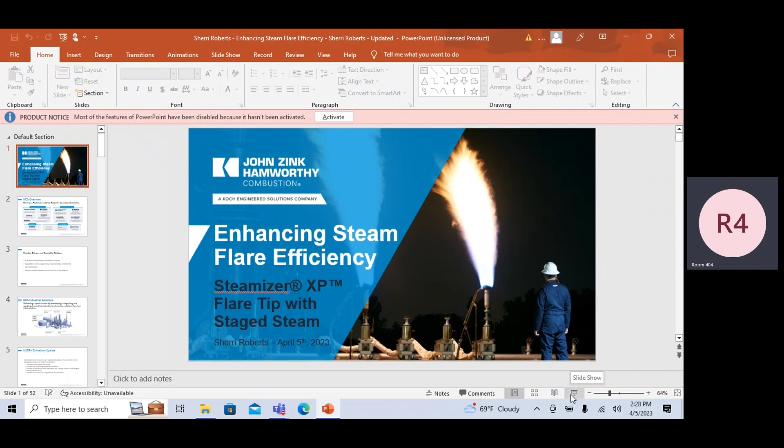Sign this. Still working. Sign this too. Yes, sir. If anybody didn't sign, would you mind signing this list?

Everything go well? Yeah, it's good, except I said way too many times. You got another pen?

I love it that you... We handed out a bunch of questions asking for feedback, and all the pens we gave out didn't work. Didn't get much feedback, right? Yeah, it worked.

You gonna switch our board up? I'm about to. Perfect, thank you. We got a QR code, just stick up there.

Sorry for going over. You're not over, you're good. So last year I was here, the guy went over 35 minutes.

So I told Chris, tell me if I'm going over. Don't know yet. I might be. We're able to monitor.

I'm gonna get a copy of this, or should I take a picture of it? I don't know, I think I do, but...

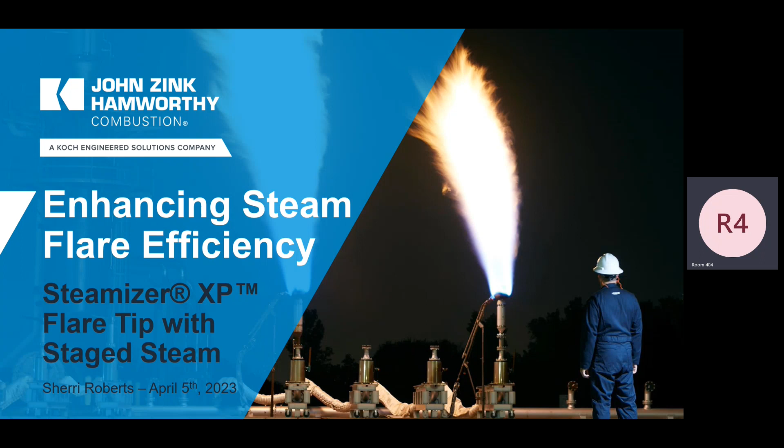I'm gonna talk a little bit about steam flares and how some technology we have can help improve efficiency on steam flares and help you meet some of these regulations that have come down the pipeline in the last few years. Just a little bit of brief history about Zink.

We get a lot of questions lately. Are you guys Koch? Are you guys Zink? Who are you? We are still Zink. We're still very proud of our name. But we are part of a company called Koch Engineered Solutions.

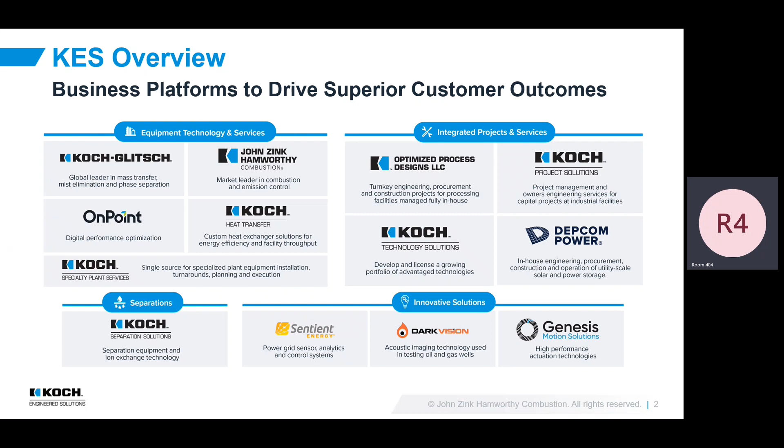We found some synergies across our sister companies. Some of them you may recognize up here. So we kind of teamed up with a lot of them, how we can bring value to our customers, how we can team up and bring those options to you. And that's why we have the umbrella company called Koch Engineered Solutions. So if you hear that name, we are still Zink, very much so. This is just kind of a program we have with our sister companies to help bring value where we can.

Those are slides, I just don't want to go over on time here. So I think most of you were probably in the training yesterday that our Spectrum friends gave, and it was a great update on regulations. So I'm not going to spend a lot of time on this, but the main point of my presentation is how we're going to address these regulations for you guys.

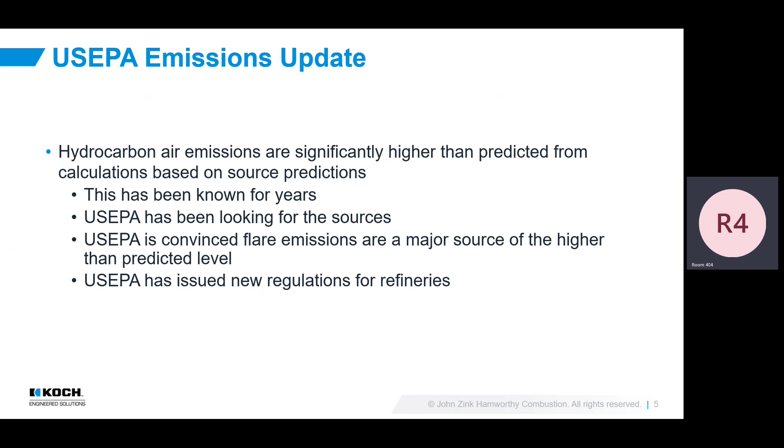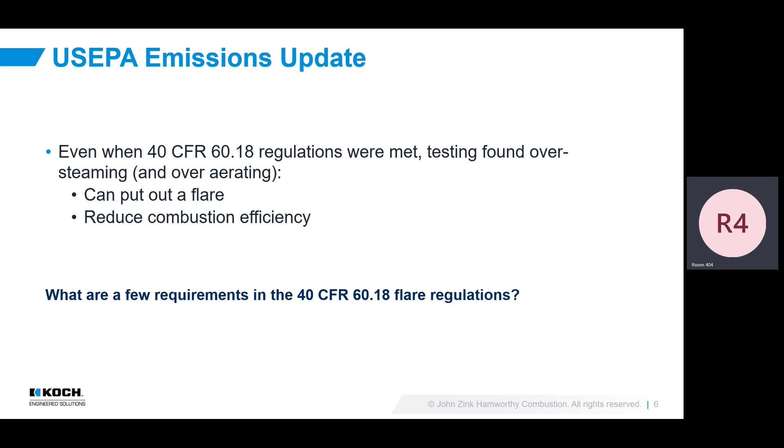So just quickly, all of you I'm sure are familiar with the EPA emissions updates that have come out. Stricter requirements for flares, especially on steam assisted flares. From all this testing, it was found that even when 40 CFR 60.18 is met, flares can be oversteamed. Their combustion efficiency can be greatly reduced. So this is the solution here that we're trying to find: how can we meet this? How can we help you guys meet these needs?

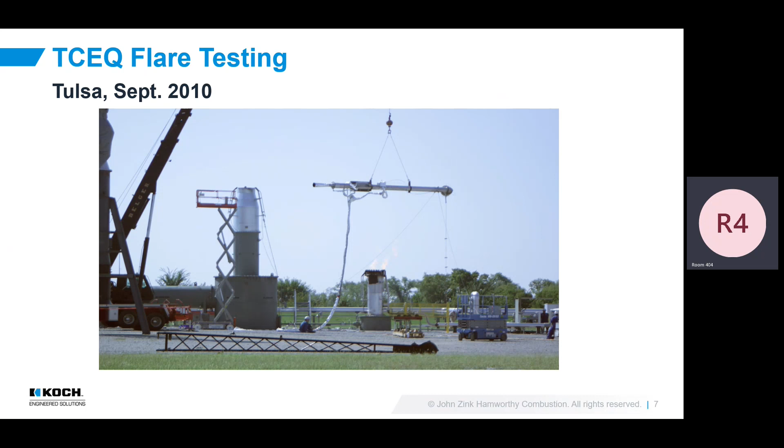It's really hard to do this at a large scale, like in your facilities on staff, which is why our test facility was used for it. While it was done at the Zink test facility, we did not run the test. It was totally independent. We just basically provided the facilities for that testing to be completed independently.

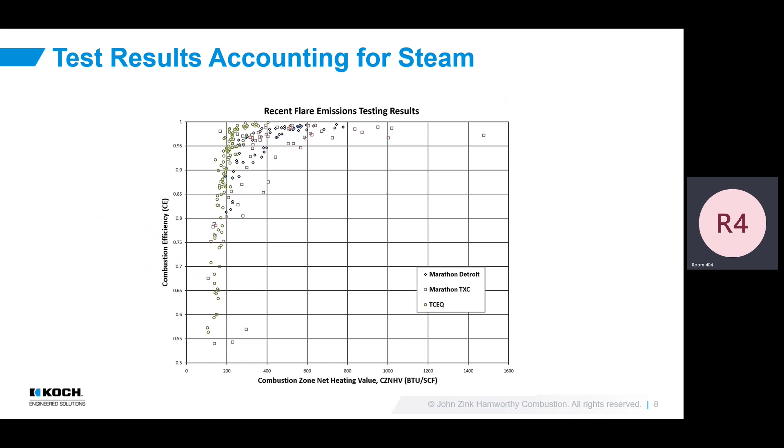You can see as that reaches that 200 to 300 combustion zone net heat value, how quickly those combustion efficiencies drop off. It just takes a nosedive as soon as you hit it. That correlation was found from going through all these test results, and that's where the combustion zone net heating value values came from and got put into those regulations.

I really like this slide. We got it from the TCEQ. They've actually used this in quite a few testing, but we borrowed it from them. It was also shown yesterday, but I want to hit on it again.

The key part in all three of these pictures is that the flare gas is exiting at the same flow going to the flare at all these times. It's the same heat value in all these pictures. The only difference is the steam rates going to the flares. You can see the differences in how these flames look. I would argue even in this one, there's not a lot of flame going on.

What you want to look at here is the steam to vent gas ratios. In this first picture, we have a very bright flame, getting pretty good destruction efficiency just by visually looking at it. It was proven it's a 99.2 destruction efficiency in that first picture. Your steam to vent gas ratio is 0.29. That's a very low steam to vent gas ratio. Most flares out there don't operate that low, and steam flares do not.

But let's jump it up just a little bit. 0.29 to 0.54 - that's just like a little bitty tick on your steam valve, right? You can kind of control that close anyways. Not very good, but we jump it up to 0.54. Your destruction efficiency automatically drops to 90.6. That doesn't sound like a lot, right? Not too much, but that is significantly a lot for emissions coming out of your flare.

So you're at 160 pounds of unburned flare gas. Now you're at 1,880 pounds of unburned flare gas. That's a lot more flare gas that's emitting from your flare.

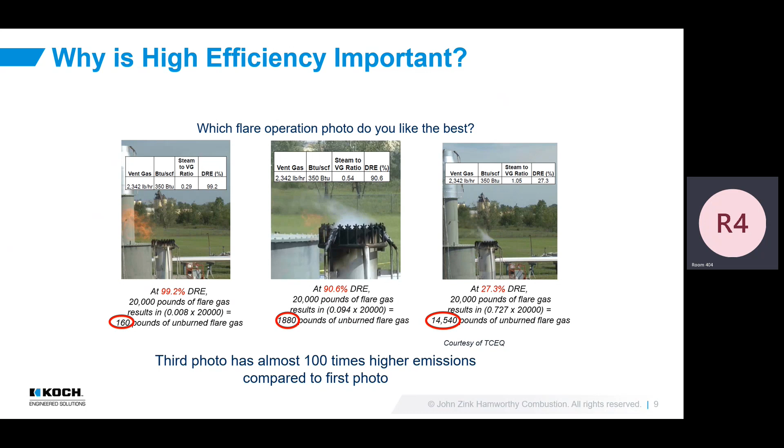So what did all this testing tell us? I like the joke I was told yesterday - water puts out fire, right? That's essentially what we learned in all this testing. If you oversteam a flare at turn down conditions, you reduce your combustion efficiency.

From this testing, it was found that if you have luminous flame on your flare tip, it's a pretty good assumption that you're having good destruction efficiency coming out of that flare tip. Operating at the incipient smoke point can be shown to have the highest destruction efficiency. You guys know what I mean by the incipient smoke point? Getting a couple yeses - that's literally right before it starts to smoke, so you start to see those black formations in your flame, but it's not actually exiting. That's what we consider an incipient smoke point.

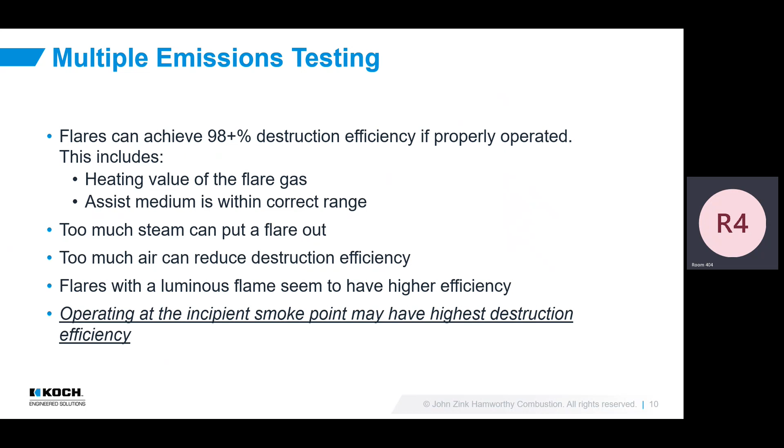Your flare operating envelope is going to be much tighter than it was in the past. Used to, this is all we were worried about - we didn't want to see smoke coming from our flares. A lot of operators even wanted to see no flame coming from a flare at all. Of course, we all know that's not a very efficient flare at all.

One of our long-term process engineers actually retired last year. He likes to tell a story. We got a call having a complaint of odor coming from a flare, so he goes out there trying to help them out, and this is what he sees.

So he says, well guys, you're putting out your flare, you're putting way too much steam up there, you need to back it off. They did. Flame came up, odor went away. They said, hey, this is great, let's go to lunch.

Before they even leave the refinery, the head of the refinery calls and says, what'd you do to the flare? Why is there a fire up there? You need to turn that back off now. It's like, well, that's what we had to do to get rid of the odor. I don't care, I don't want to see a flame up there.

This is what we get complaints about, this is what I get calls about - I get calls about this in the middle of the night. I don't want a flame up there. So it's just a knowledge thing. People don't understand it, people don't understand flares.

Just like we were talking about yesterday afternoon in California, getting 911 calls when there's a flaring event in California. This is what we want to see. So it's going to take knowledge and explaining this to everybody, but this is how your flare should look, with that preferred luminous flame.

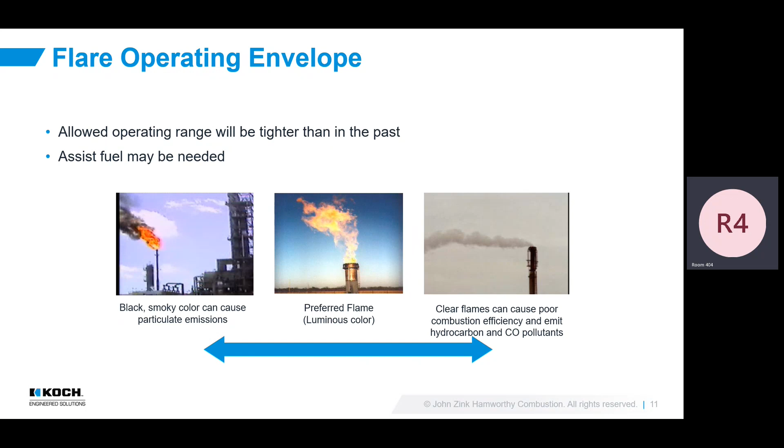So we had the refinery rules come out, so everybody's familiar with those - they've already been implemented. The biggest thing that came from there is that net heat value combustion zone. At high flow rates, sure, no problem, these steam flares are no problem at all. Where we struggle with this is at turndown conditions.

All steam flares should have a minimum flow going to them, steam flow going to them at all times, to help protect them. If you don't have that minimum steam flow going, there's a good chance you're going to burn up your flare very quickly. So there's a trade-off there - do I want to not have to add gas to my flare, or do I want to protect it and not have to replace it in 6 months? All flares should have some sort of minimum steam going to it to help protect it over time.

Some other benefits you got out of it is that 1212 heat value for hydrogen, so that's a good thing - you got hydrogen, and that is based on a 15-minute block average.

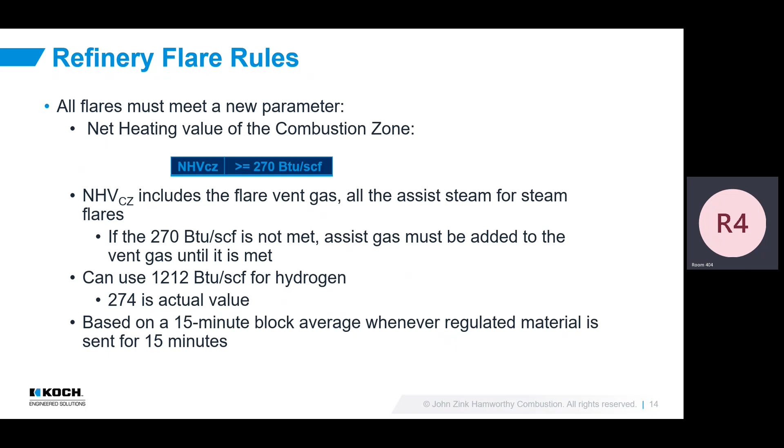So just a quick glance of what you used to have in your refinery ground flare, and this is what you need from the refinery rules. You have to have a minimization plan. You have to measure your flare gas. You have to be able to give the composition or the LHV measurement of it. You have to have an assist gas control - if you're not meeting that net heat value combustion zone, you have to add assist gas to it. You have to be able to measure your assist steam or assist air, depending on the type of flare you have. And also you have to be able to monitor with a camera and keep that in your files.

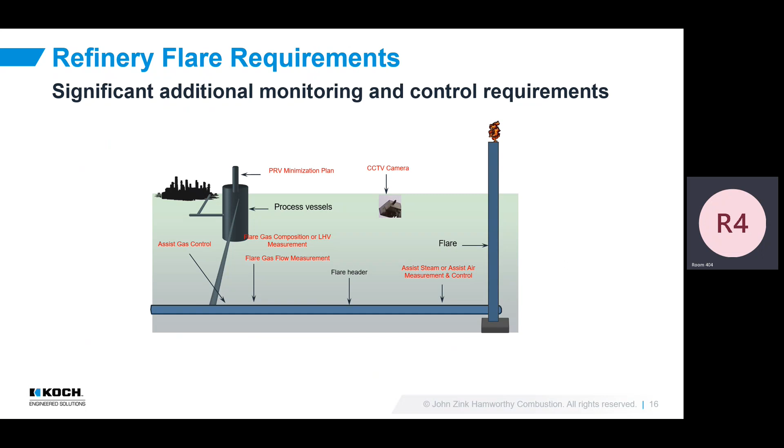So I just like to show that to show the big difference between flares. When I first started in the flare industry, we didn't have any of this, so it's very nice to know. Ethylene rules came out, very similar - really the only addition was some topics on pressures.

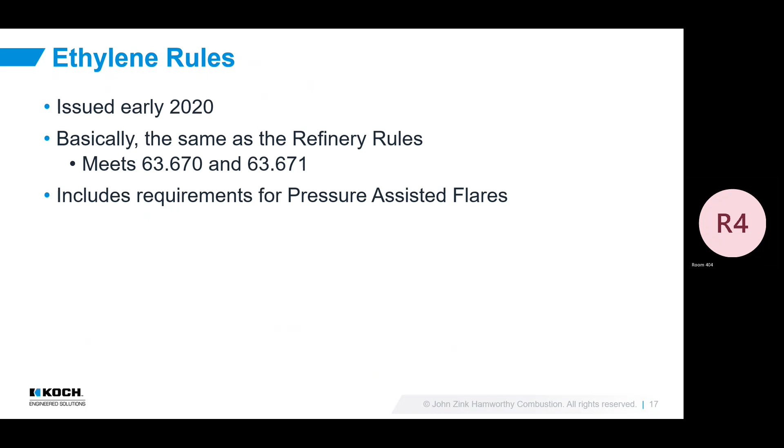So what does this mean for flares, right? We want to be able to minimize your flare - they're wanting you to minimize your flare gas flow as much as possible, they don't want you to flare. But that means it's much harder to operate in turndown conditions, and also have to minimize your steam flow if you're not already at minimum steam flow. That increases your net heat value combustion zone - if you don't have enough, you have to add assist gas. All of these factors have to go together and get very complicated on how to operate your flare.

And this operator is not worried about the flare - he's worried about these 100 other things going on with your flare system.

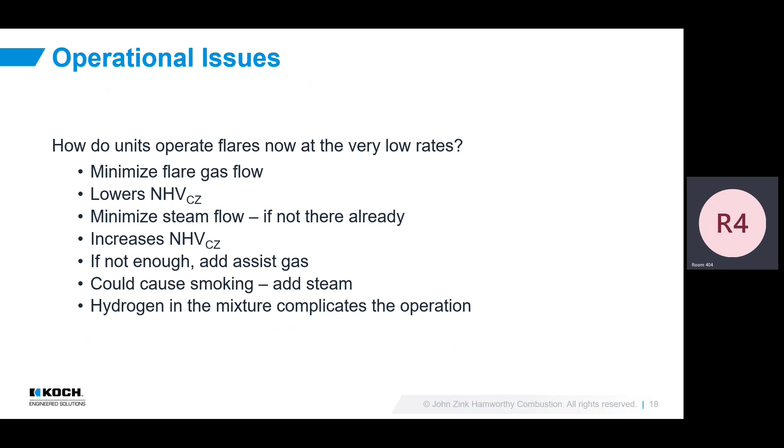So let's think about steam flares. How many of you have steam flares?

Yay, good. I have some steam flare people out there.

Just a little bit of history on the flaring industry and flaring world. The flaring world started in about 1940, when the government started regulating venting. Steam flares weren't part of that at the time. Basically, it was just a fire on a stick. They called John Zink and said, 'Can you give us a burner on a stick?' And that's what we supplied. That started the flaring industry.

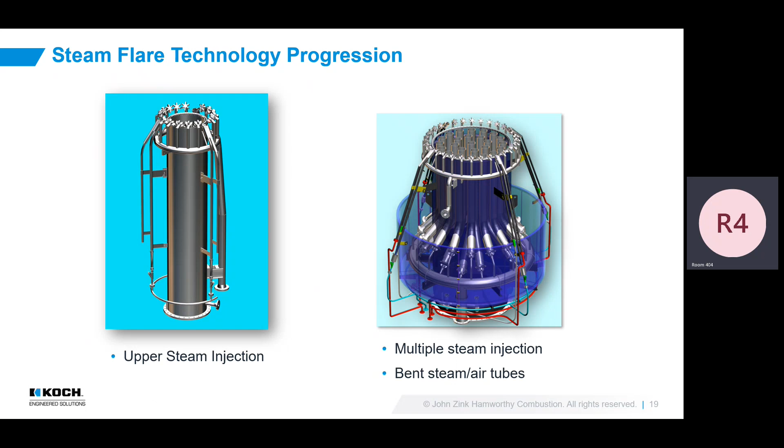I didn't hit on this earlier, but what is this steam doing in this situation? Does anybody know how this steam makes it smokeless? Bringing in a large volume of air with turbulence - so it's not the steam, but it's the air. Thank you, that's great - that takes it with it.

So if I want air in there to make it smokeless, why wouldn't I just use an air flare? Anybody know that? Steam is actually much more efficient at entraining air than air is itself. I could put air through the steam line at the same pressure, the same flow, and it would not entrain near as much air as steam would, because steam has a higher critical velocity, and that's why it's able to bring in that extra assist air. So that's why steam flares are much more efficient than air flares. Most of the time in your plants you have some extra steam available, a blower, so it's an available utility. It doesn't cost a lot of money over supplying these huge blowers that you have to run on power and things like that.

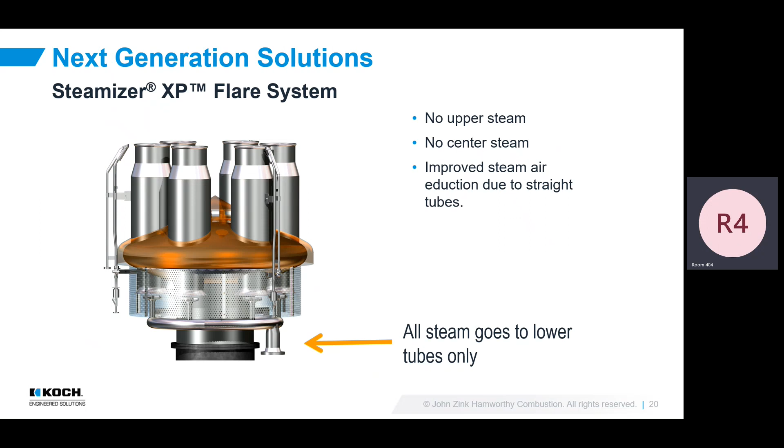So why is the XP so much better than other flare tips, than those other ones we saw? It provides superior smokeless performance through what we call moderated shear mixing. That's what was in the patent we filed on the XP.

Basically, when you burn hydrocarbons in reduced air mixtures, carbon particles are able to form, which build upon each other and create soot particles, which is then smoke. This is especially important for unsaturated hydrocarbons, which we call soot precursors, like olefins and propylenes. They're very reactive, so as soon as they start to heat up, they crack and start to find carbon particles to attach to, since there's not enough oxygen there where you need it. That's why the XP can provide superior performance over those other styles of flare tips.

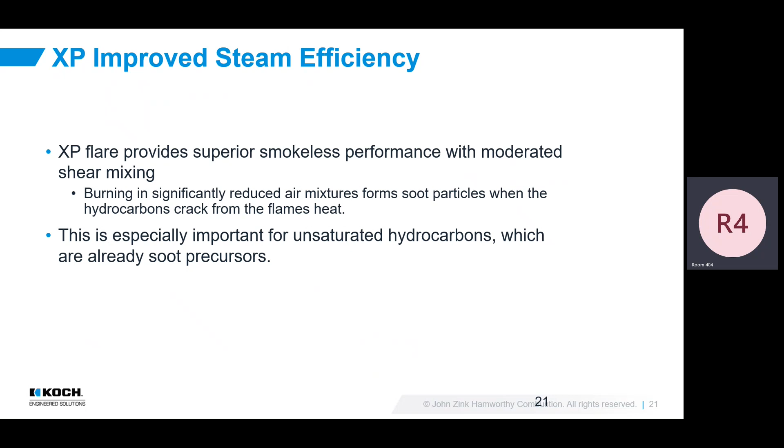Kind of like in your ethylene furnaces, you get coke filling up in the tubes—that's all carbon. That's what your flares do as well if you don't get oxygen there for it to react with.

So the moderated shear mixing is up here at the top—that's a key part of the XP. The other part is secondary air entrainment. With a 48-inch body on those other styles of flare tips, you have this huge bluff body that you're trying to pull ambient air around, trying to increase mixing energy. But around a big bluff body, you just can't get as much mixing or pull as much ambient air into it. We've broken this up into different arms, smaller bodies, and you get more perimeter area to really pull that ambient air in. So it creates its own jet as it exits at the top and pulls in ambient air to help provide additional smokeless capacity.

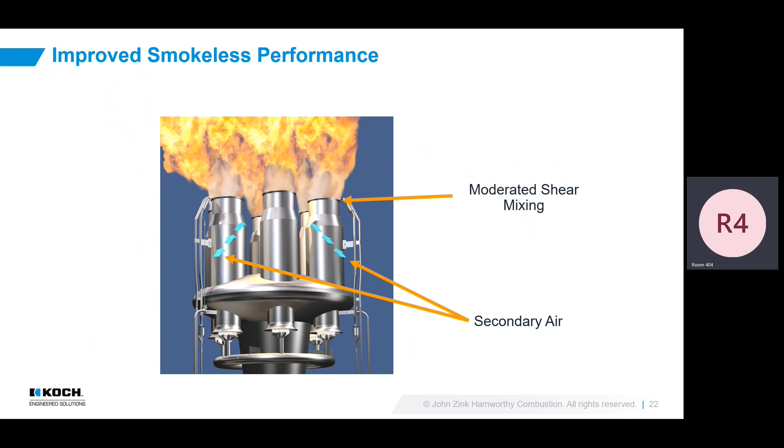Here's a better view with the windshield off the bottom. You can see the steam jets here going into a straight tube, going up inside that tube as well.

First of all, the API just sets a steam to hydrocarbon ratio across the board. It's hard for your flares to meet that at turndown conditions, because steam flares are not as efficient at turndown. You have this large steam jet designed to flow thousands of pounds an hour, but at turndown you're flowing hundreds of pounds an hour at a much lower pressure. So it's not nearly as efficient in those situations, which means your steam to hydrocarbon ratios automatically go up.

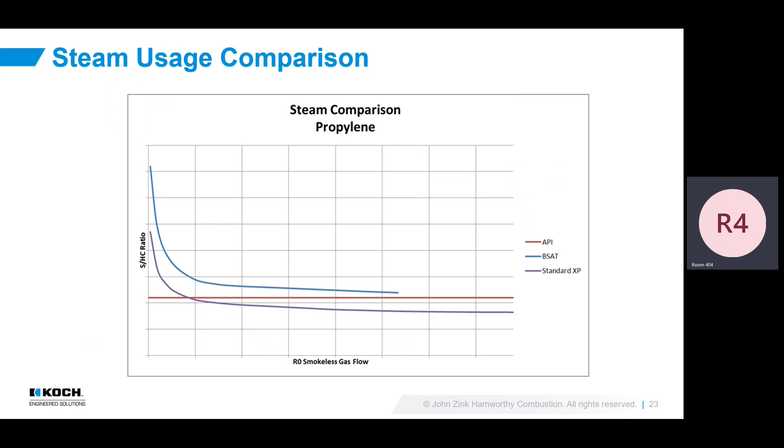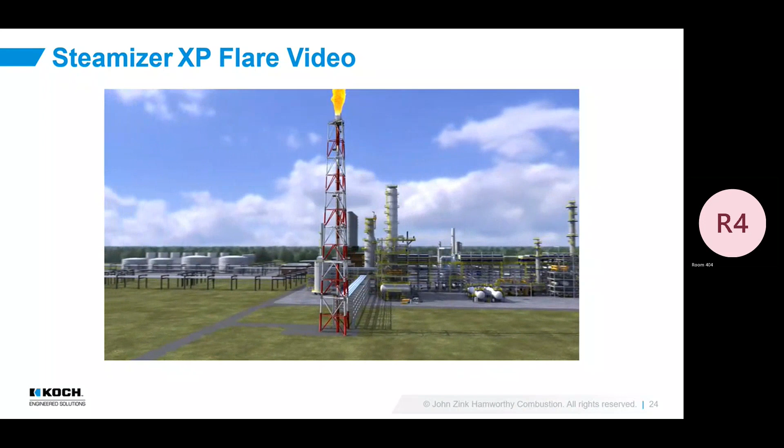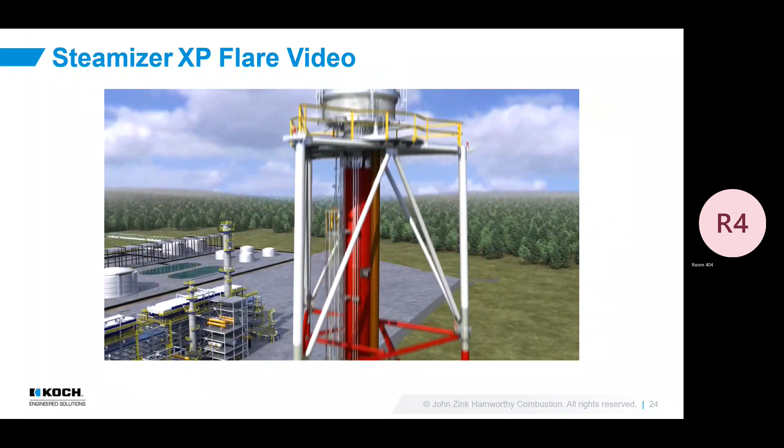Gonna zoom in up top here, see the different points as we go through it. The first is gonna show you the pilots. Not every module is piloted because they do cross lights, so that's why you don't see a pilot on every module.

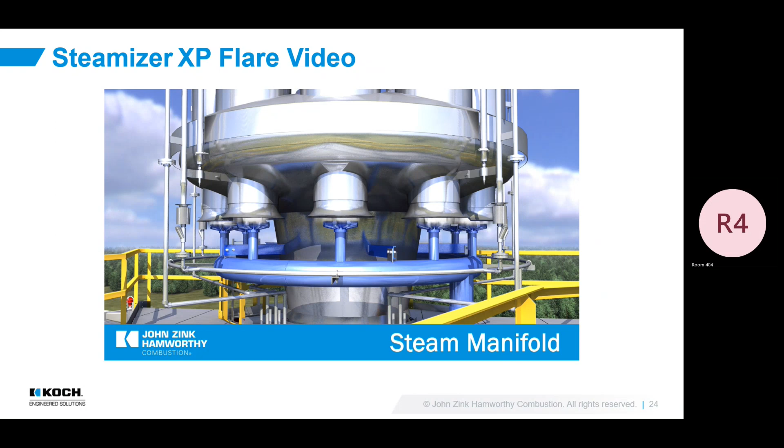Zoom in here where all the steam is coming in on the lower portion of the flare tip - that's the steam header.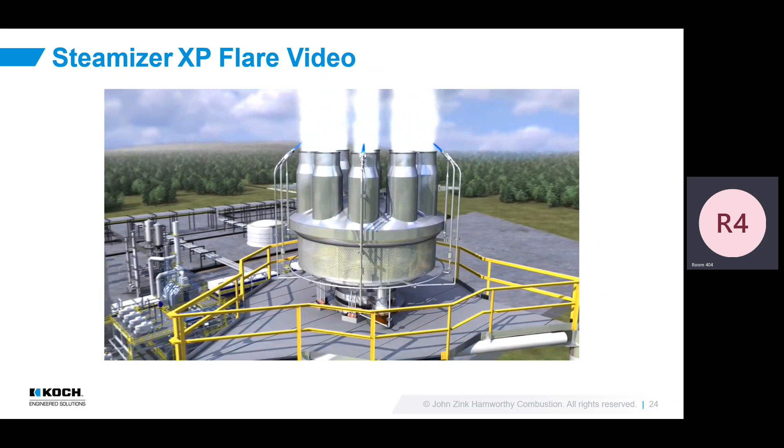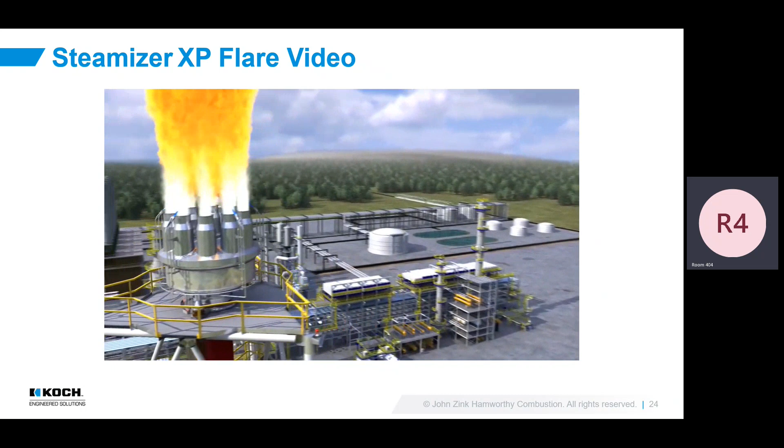Then you have your straight steam tubes. That's another big thing between the SI style flare tip. On the SI style flare tip, you have bent steam tubes, and you have to overcome that back pressure through those steam tubes to pull that air in. On the straight steam tubes, we don't fight that issue, so you have less pressure drop you have to overcome, which allows you to pull in more air and be more efficient in those situations as well. I forgot to mention that earlier, so just some benefits that the steamizer can offer as well too.

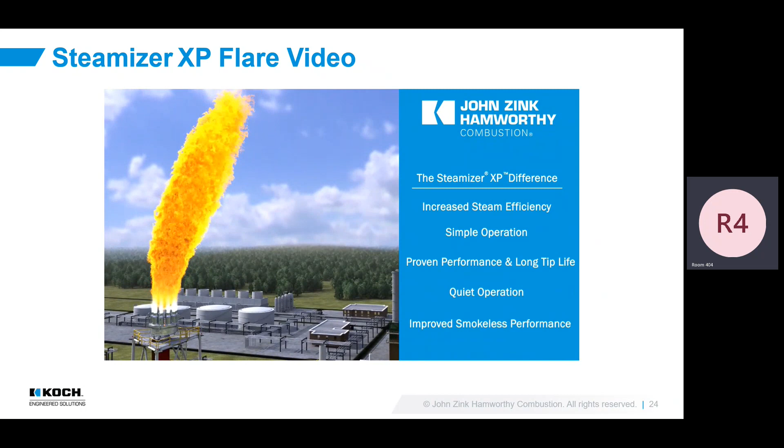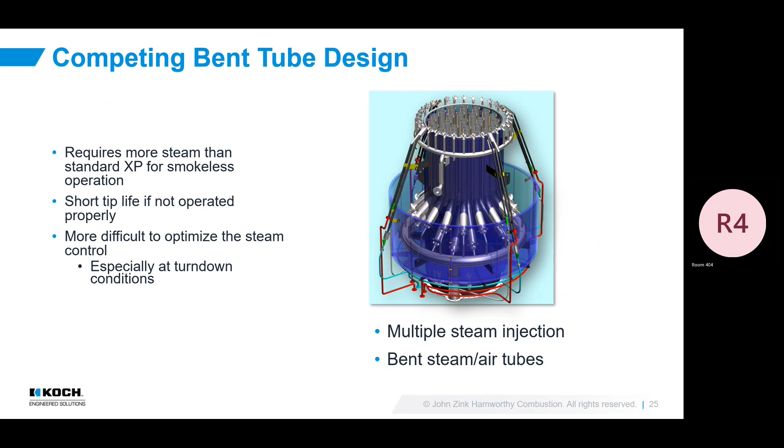The other part with this style of flare tip is it can be difficult to control. You have the upper steam line you have to control, you have the lower steam line you have to control, and a lot of times on those flare tips, you also have the center steam line you have to control. So how do you operate these flare tips?

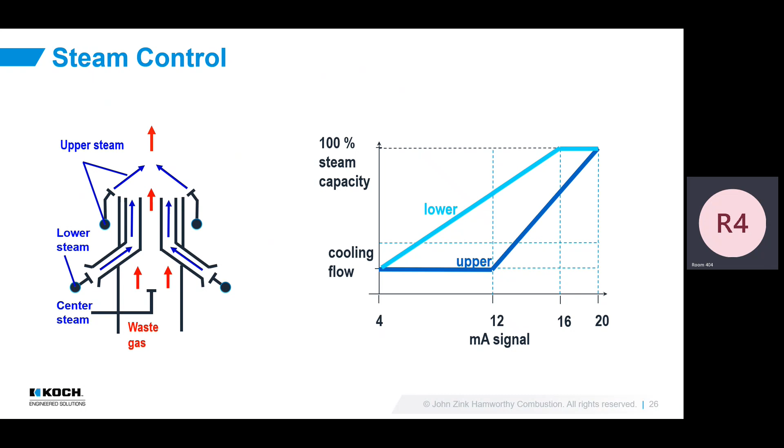You need to increase that lower steam to around 70% capacity before you increase the upper steam very much at all. From that point on, you can pretty much go up linearly and control, providing as much steam as you can to that flare tip for smokeless tips.

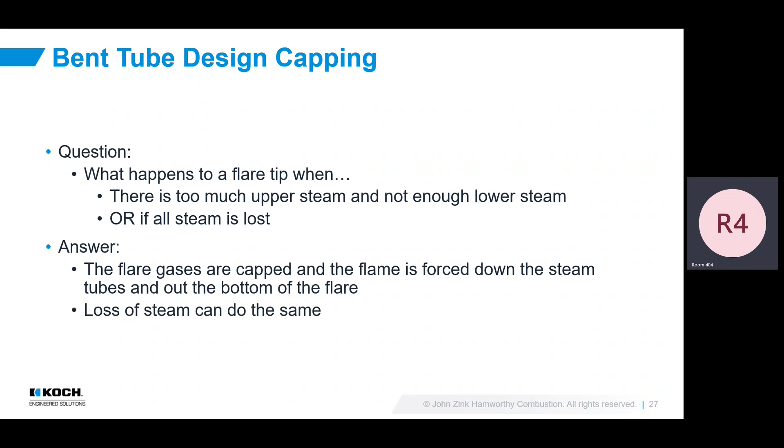But why? Why can't I put my upper steam where I put my lower steam? Anybody ever seen this phenomenon? Know what it's called? Capping. Basically the flare gases cap - that means we cap the flare and it pushes flames back down the tube.

We took a video of this at our test center to kind of see it in action. So we've got a smoking flare here. Somebody switched the valves and turned around, we don't know - put the upper steam on first, maybe just an operator turned the wrong tube. You can see how much damage that could quickly do to your flare tip.

I've also taken them - I didn't take it, somebody else took the muffler off this flare tip, so you can really see what's happening here. But if that muffler was there, you're damaging your refractory in there, you're damaging the muffler itself, you're damaging your mixers, your pilot mixers are down here, and also the steam jets and stuff down there.

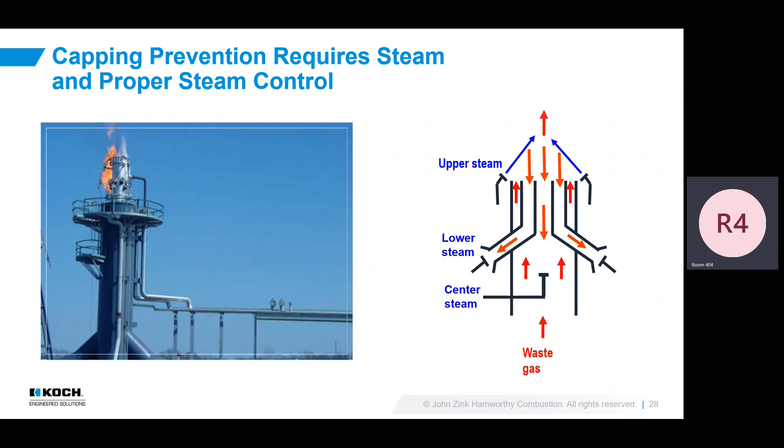If flares operate like that for very long at all, it can very quickly damage your flare tip. We've seen flare tips have to be repaired in less than an hour for operating in this type of situation. So not something we want to see, not a good situation to be in. Unfortunately, it's just part of operating these flare tips that can be difficult to do, especially with an operator that's got 100 other things going on - he's not really worried about the flare.

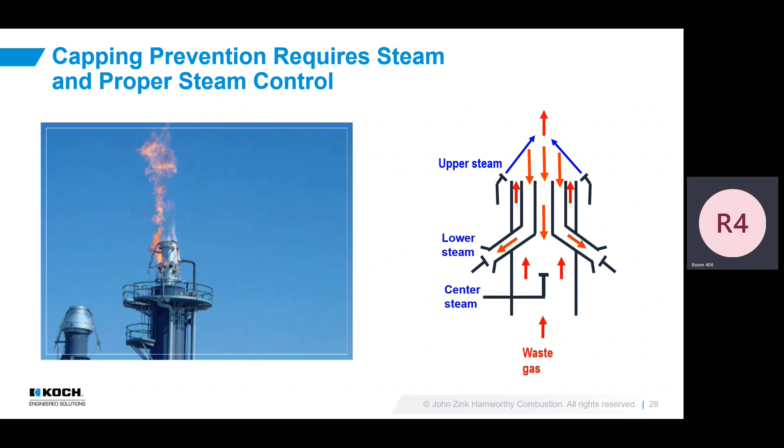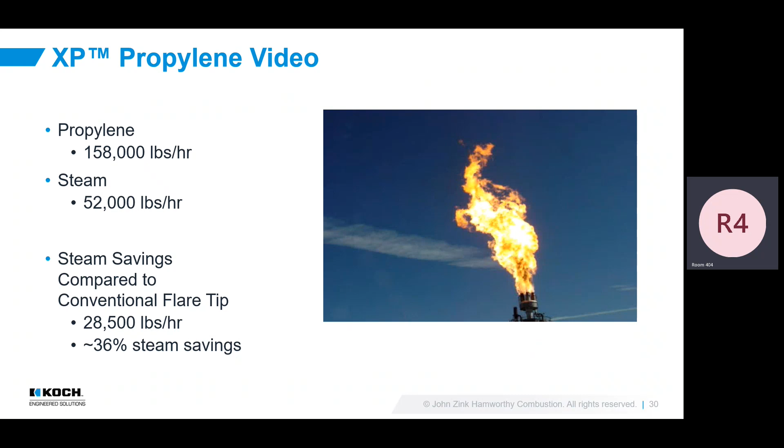Next video is propylene. Look how much brighter this flare is - that's one of those unsaturated hydrocarbons I was talking about. You can see those black formations already happening here - those are carbon particles that are starting to form very quickly down here low in the flame. But with the XP, we're able to treat it in time so it doesn't exit the flare.

And this system has 36% steam savings.

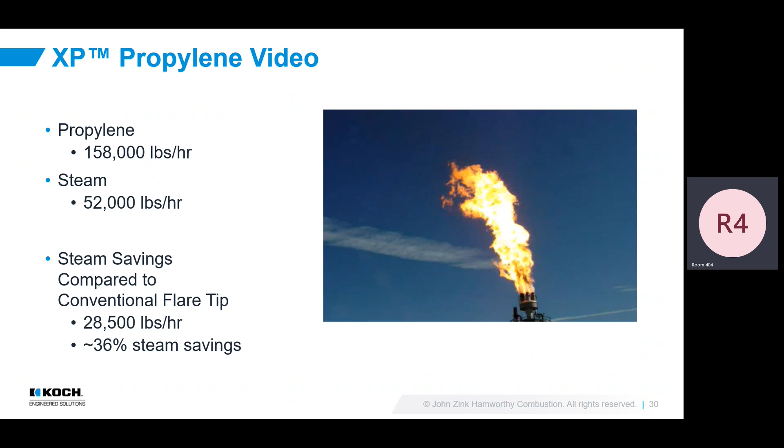I must have muted this video, but not the other one. So it's a much brighter, more luminous flame on the propylene. You can see those differences in the type of flames and how they burn on different applications.

I've got a few case studies here I'm going to go through pretty quickly. This first one is actually the first two XPs that we ever supplied. This is to a Europe refinery, and they are actually twin stacks. You can see them here. There are two XPs installed in them.

They came to us, not just us, they came to multiple flare vendors, but the situation they were having, they needed higher smokeless performance, but they couldn't provide any more steam to the system. They wanted to actually reduce how much steam they were even sending to the flare. They were having issues with flame stability on their current system, which was causing them some noise issues as well.

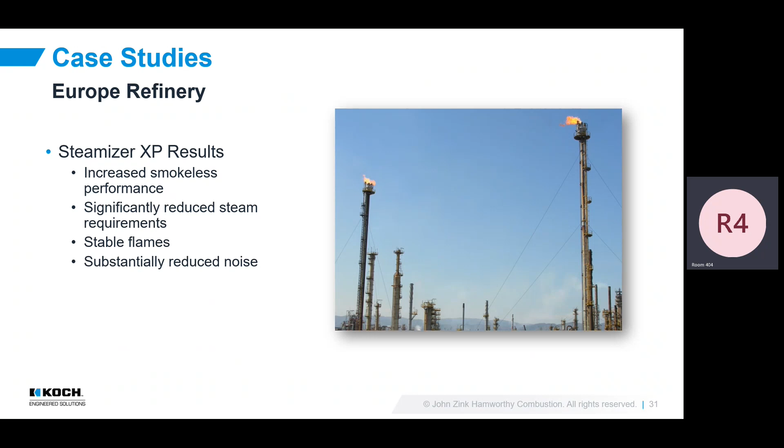So they selected the XP, took a gamble on us. This was the first one that we've ever sold. I'm very happy with it. This flare's been in service now close to 20 years, and they've never had to replace it. Actually, we've never had to replace an XP at all due to damage. We had one that they burned over in the Middle East for about 6 months without steam, and they had to replace it, but not much you can do in those situations.

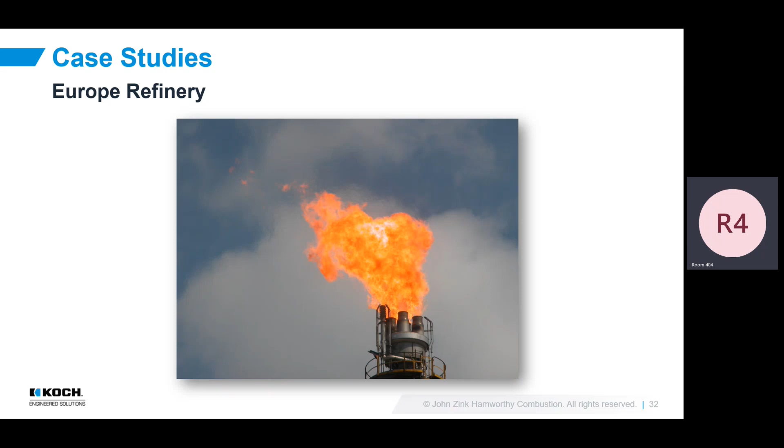But it met all their needs. They were able to increase their smokeless performance, reduce their steam usage, get rid of the noise problems, and have great flame stability on these flares.

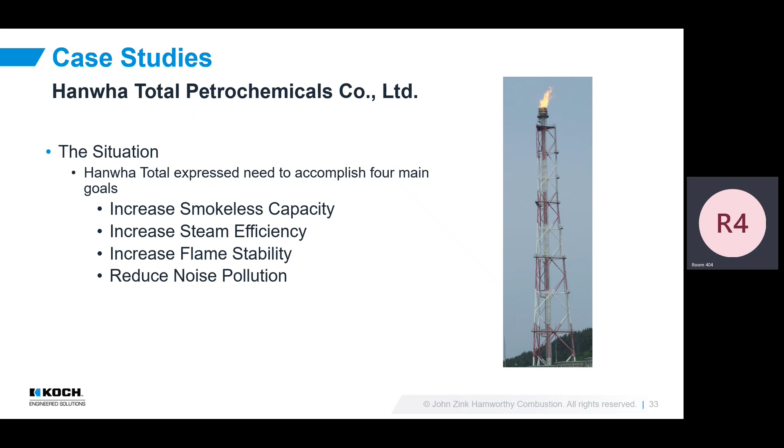Very similar, this one is in Korea, Hanwha Total Petrochemicals, used to be Samsung, but they changed their name on us. Same, a lot of very similar situations. This is actually a 60-inch XP, I think one of the first 60-inch we sold in the XP style system, but had the same issues: smokeless capacity, noise issues, stability, and they were getting a lot of noise complaints.

After extensive evaluation, not just John Zink, but other flare vendors as well, they selected the XP and installed it there. You can see on the system, very large flare tip. Since startup, they were able to see an increase in smokeless capacity using the same steam as their tip, and they also got rid of their noise and stability issues.

This plant actually took our old SA style flare tip down and set it up in their facility as a monument of how well the flare had served them, and we're happy with it, even happy with the new system. Different cultures, it's really neat to see. I'd like to go see it sometime.

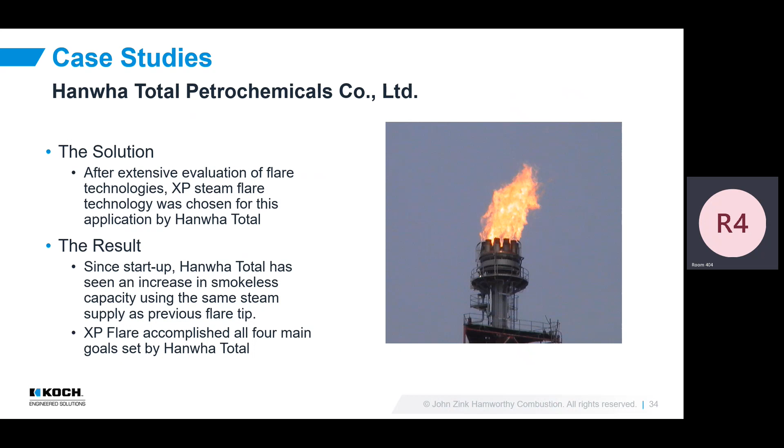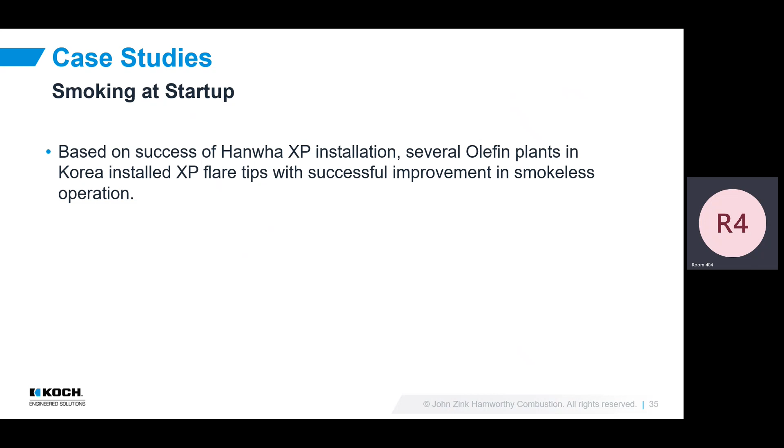So this is my favorite one. The plant previously that I talked about is in, pretty much, a complex that has several plants in it, like many of us know, like around here. Based on the success of the startup of that XP, several of the plants in the area called us and said, we want that same flare tip. We've seen how much improved performance they've gotten out of that flare tip, we want the same one. So we've actually sold several more in that same area based off the success they saw from the XP flare tip. So this is my favorite case study.

Last one I'm going to share with you, this is a Gulf Coast olefins plant, a little bit closer to home. They called us in 2013 and said they had the New Year's resolution to give up smoking. We're like, that's great, not sure how we can help you, but be healthy. We love that. But they weren't talking about that—they were talking about their flares. They wanted to cut out the smoking from their flares.

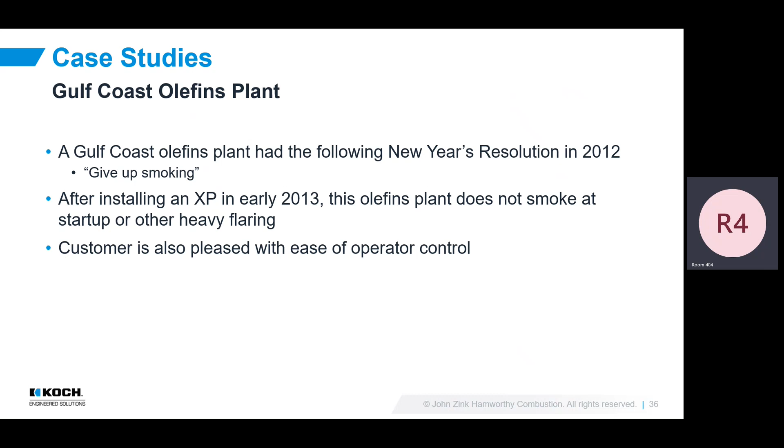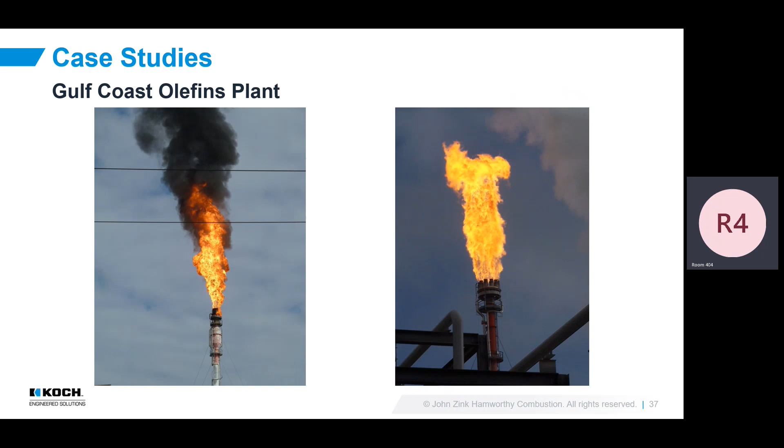So to show you what it looked like, this is their old flare tip, and this is their new flare tip operating about the same flow rate. Those are the differences that we provide with the XP from the old style SA flare tip.

So talked about all the benefits of the XP. Low steam consumption, they're easy to operate, all steam comes from the lower portion only. They have proven operation and long tip life. These have been in the industry for a while now. There's no upper steam manifold in that flame zone, so you don't have to worry about it getting damaged, and you can't cap the flare tip.

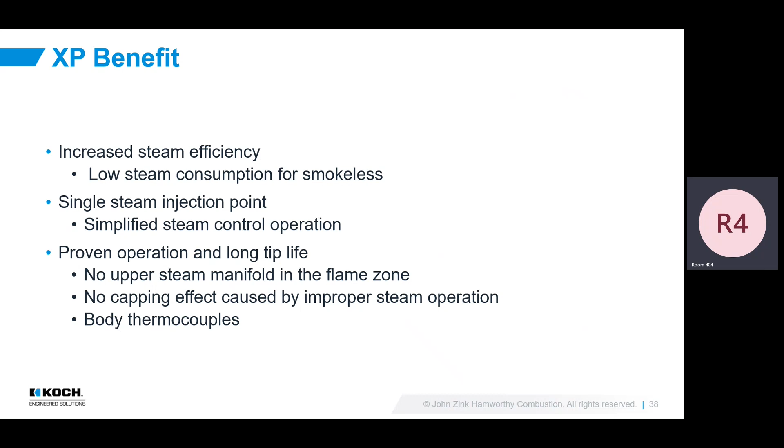And we also put body thermocouples in these XPs as well, so you can watch for internal burning and react to it, versus most flare tips don't have that. So that's another way we're able to simulate these flare tips.

But what I'm really here to talk to you about - in the past, as flare vendors, we were always worried about your max hydraulic capacity. We wanted to know what you wanted the flare size for, how much smokeless capacity can we give you, what's the best that we can do in those situations. So we were worried about that upper end of your flare capacity.

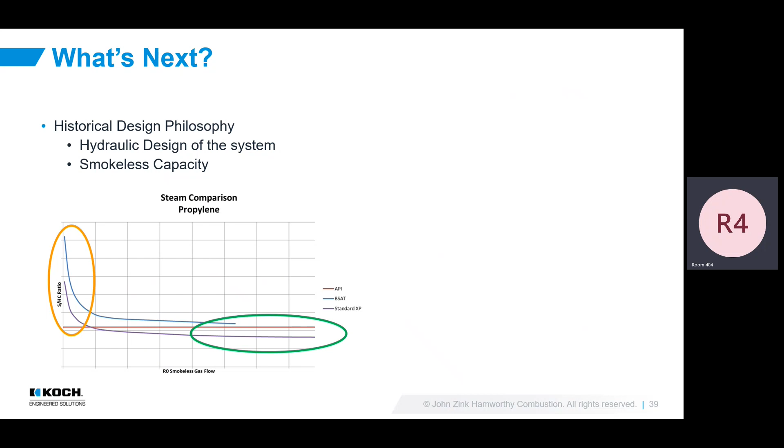What we really weren't even thinking about was those turndown conditions. Nobody worried about turndown conditions. They just wanted to know the max smokeless capacity you could get out of the flare tip. And so this has been a neglected design philosophy. Most of these flares live their life at very small flow rates going through the flare tip.

So this is something that's important to you guys. Something we probably should have thought about a long time ago. The regulations really brought it up in detail. We need to think about these turn-down conditions and how we can help in those situations, really help meet that net heat value combustion zone.

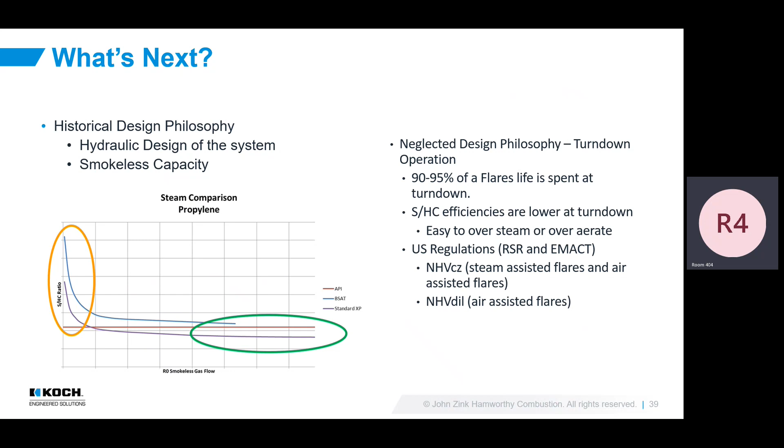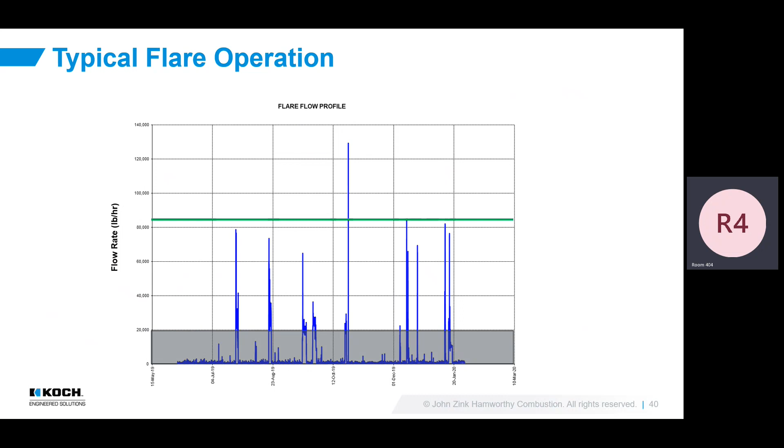So this is actually something that we use for flare gas recovery, but I like it because it shows flare flow profile across a long time - I think this is over a year's situation here. Where is this flare living at all the time? Where's the flow rates? Way down here, right? So here's your max capacity of your flare, but this is where your flare is performing most of the time.

Really, those turndown conditions, we'll zoom in a little bit even more on that. So this is what we need to be worried about. This is the next situation in flares where we're really talking about the industry.

So when all the refinery regulations were coming out, we once again innovated, trying to think for ourselves, what can we do? How can we help our customers meet this need? And that's where we developed the stage steam. So we want to be able to meet that combustion zone net heating value. We have to meet that dilution effect for minimum steam, so you aren't having to add sysgas to your flares.

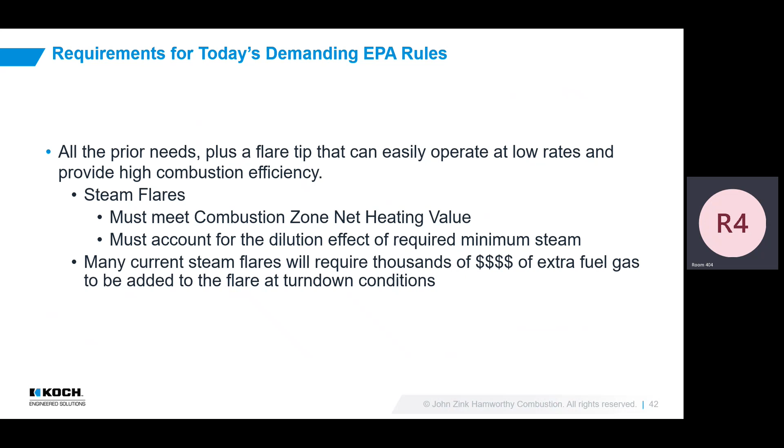So if you don't meet that net heating value combustion zone, you're putting money into your flare and emissions. So if you're adding that sysgas, you've got more emissions coming from your flares, and you're paying for that sysgas going out of it as well. Not anything that anybody wants to do.

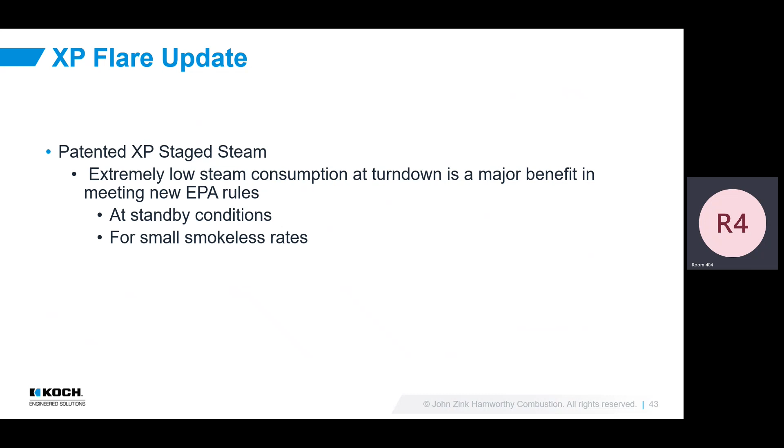So we had a patented product called the XP Staged Steam come out. It provides extremely low steam consumption at turndown conditions, while still protecting your flare tip and also providing some small smokeless flow rates as well. So what does that mean?

In normal steam flares, you have a large steam jet that's designed to burn, let's say one of these steam jets is designed to burn around 13,000 pounds an hour coming out of it. When you turn that down to the turndown conditions, you've got 333 pounds an hour coming out of it. Does anybody know what pressure you'd be coming out of the steam level at? It's designed for 100 psi at max. So when you're down to 300, what do you think you're running at?

Take a guess - about 1 psi or less. So it's not very efficient coming out of an orifice, right? All of our steam jets have orifices drilled into it. At turndown conditions, you're at 1 psi. It's not coming out of there very fast, and the wind is just gonna kind of blow it away. It's not really pulling any air there to protect your flare tip at all. Really what's happening there is you're just protecting your steam manifold by cooling it off.

Okay, you've got an overflow going through it. So we developed a second steam manifold that's installed in the same place, but they're designed to operate at those low flow conditions - so you have the low flow conditions, but it's designed to operate at that high pressure. So you can take advantage of that high pressure and really pull in that air in those low flow conditions. So you're pulling in the air that you need to actually get some smokeless capacity, actually help shape your flame a little bit, but it's requiring much less steam to do that. So then you don't need as much minimum steam to the flow, which can help you meet that net heating value question.

Steam control is still simple though. Even though you might have multiple steam lines going up to your flare tip, up to 2, maybe 3, versus just 1, it's all coming at the lower portion of your flare tip. You just put it all in parallel and you're single signal. Operators still just have one steam control system they have to control, so it's still very simple in that fact.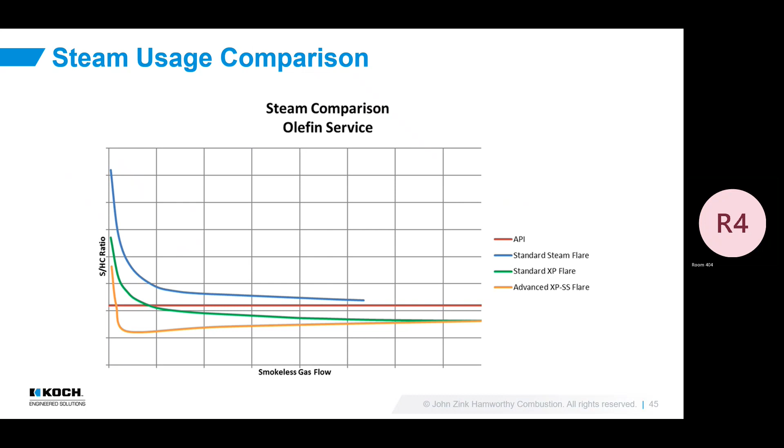What's it look like? Let's take a zoomed in look here. We also do have a 3D model. I know that will kind of be in between, but I'm going to keep this up for the end of the day if anybody wants to come up and look at it, also be out here too as well if you guys want to come look at it.

But here's the whole XP in our shop, zoomed in. This is the stage steam manifold here around the outside. This center jet is the main steam jet, so that's kind of the difference that you see there as well. So they are different steam manifolds, they do have to be controlled separately, but it's still very simple to operate.

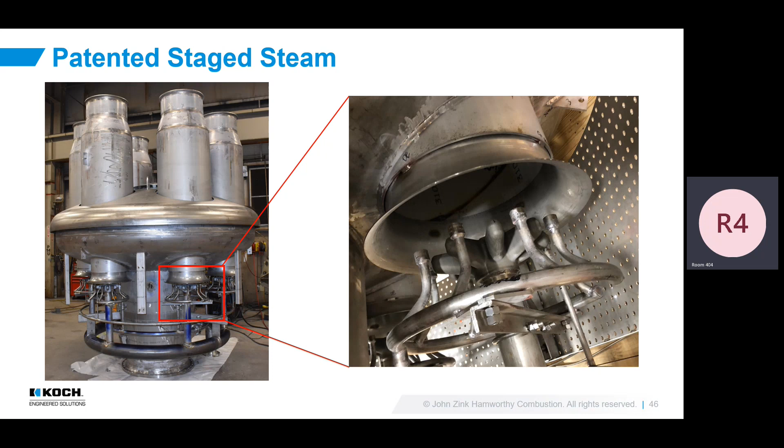So we talked about net heating value combustion zone, how that's going to help you smokeless, right? What everybody wants to talk about in today's world is the carbon footprint. How can this help me in the carbon footprint world? So we did a little calculation using the EPA calculator out there on carbon CO2 emissions, I should say.

An SA style flare tip at the same size, which has the bent steam tubes, would have a minimum cooling rate of around 1,200 pounds an hour. With the stage steam system on the XP, we can get that minimum rate down to 600 pounds an hour while still protecting your flare tip, still providing that performance you need. And that's going to be a natural gas cost savings to not meet that net heat value combustion zone of around almost $22,000 a year.

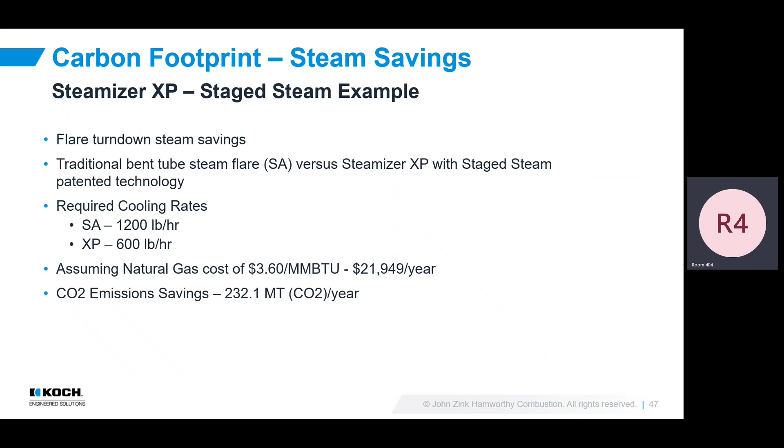Now this is using this number, this was done a while ago, that number could have changed now and then. But the big thing I wanted you to see is the CO2 emission savings, so 232. That's a huge savings factor on your CO2 footprint as well that you can use. We know everybody's trying to look at that carbon footprint savings and how you can help that, so it's just another example I'm going to show there in a different view.

Concluding discussions. Okay, the XP's been out there for 15 to 20 years. There's been over 100 of them sold in operation as well. But I've still got 15 years on here, we're nearing 20 now, and you know this as well too.

So like I said earlier, none of them have been replaced in that time, unless they were just really operated without steam for a long time. We actually even had some go through that freeze down here in Texas that you guys had 2 years ago, maybe. Operated without steam for several days, but they were fine, there was no damage to them.

They were able to start back up, no issues at all in the situation. So they seem to be very hardy. Is that the right word I'm looking for? That's really good. Robust. That's a good word.

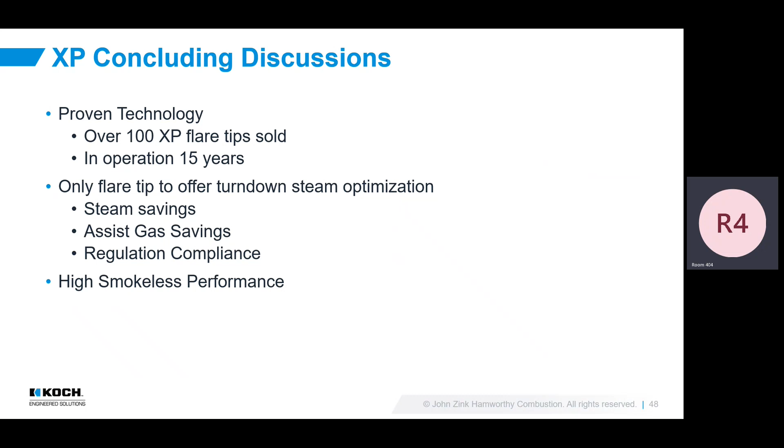So just a great flare tip overall, and then adding that stage steam to this can really take it above that next notch. It's the only flare tip on the market to offer this turndown steam optimization. It is patented, so John Zink is the only one that offers this type of system. And all of this was still offering high performance.

I don't know the total installed cost. On the aftermarket side, usually I'm replacing an SA, so those steam lines already exist. In the past, when we put an XP up there, we weren't using the steam lines at all. Now we can reuse them for the stage steam system. But adding, Chris, what do you think from that standpoint? Because it's a very small line, like a 2-inch line. Not very difficult, so very nice.

I'll let him take the recording off. I don't know how to do that. No, I know you guys were. I know, you took a picture with them yesterday. Oh, did everybody sign in on the sign-up sheet too? Perfect, thank you guys.